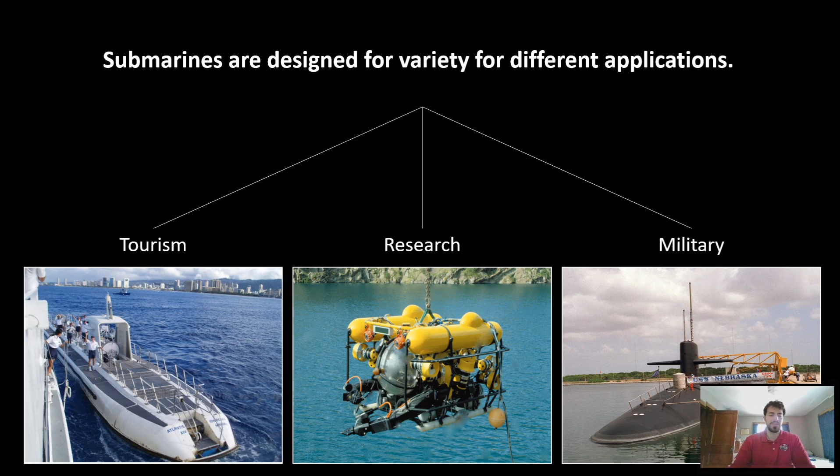They look really tiny. There's only one in service right now, and that's partially because it's just so expensive to build and to modernize these submarines. But even though only one is active, they have 6 built. And the number of people that you can fit in here is hundreds, and that's just an estimate, so we don't have any hard data on this, but they can fit a lot of people in the submarines.

I mean, that's massive. But now you might be wondering, how far under the ocean can this huge submarine go? It's so big, full of metal, it's so heavy. Well, the Typhoon can actually go as deep as 1,650 feet below the ocean. That's about 5.5 football fields, 1,650 feet below the ocean.

That's pretty deep. And now go back to that question about how heavy is this submarine, right? I mean, this is a 2 football field long hunk of metal and technology. How much does this thing have to weigh? To be honest, if I told you, it would be hard to even imagine. So I'm going to try to put it in perspective again.

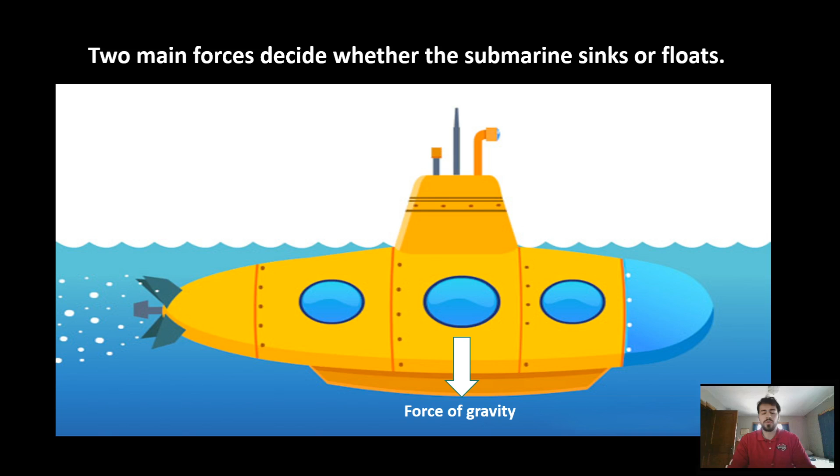Well, the force pushing it up is actually the force of buoyancy. Now, buoyancy is another thing that we may be familiar with. If you've ever been in a pool with like a basketball and you try to shove it under the water and then you let it go and it shoots up, that's buoyancy pushing it up. Buoyancy is the force of the water pushing an object up out of it.

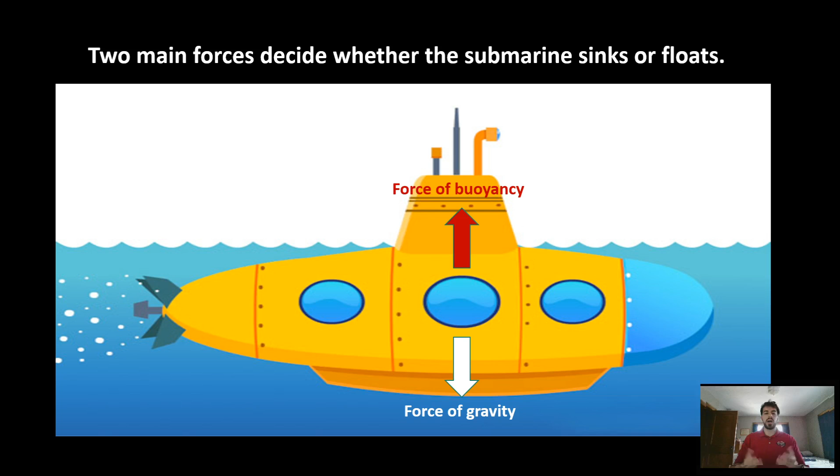All right, and that's another force that we're going to talk about in a little more detail here on this next slide. So buoyancy is important because it allows a submarine to float, but it also is the force that a submarine must overcome to sink and go underwater. And so it's important that we understand it a little bit more.

Now we talked about intuitively what buoyancy is. And so it's water pushing an object back up. You can think about a basketball under the ocean, but we need to be specific. We need to know how much force we're going to have to provide to overcome this buoyant force. And when we look at that and try to look at a numerical answer, we can use this equation.

Buoyancy equals rho times g times V. And rho is that funny looking p there. So you can think of that p as rho times g times V. In this equation, rho stands for the density of the water. Now that's a constant. Everything has a certain density, and so that's something that we can just plug into this

equation. The g stands for gravity. That's also a constant, and is something that we can plug into this equation. Now the thing that we can change, and the last part of it, is volume. So we need to change the volume of our submarine to change how much that buoyant force is operating on it.

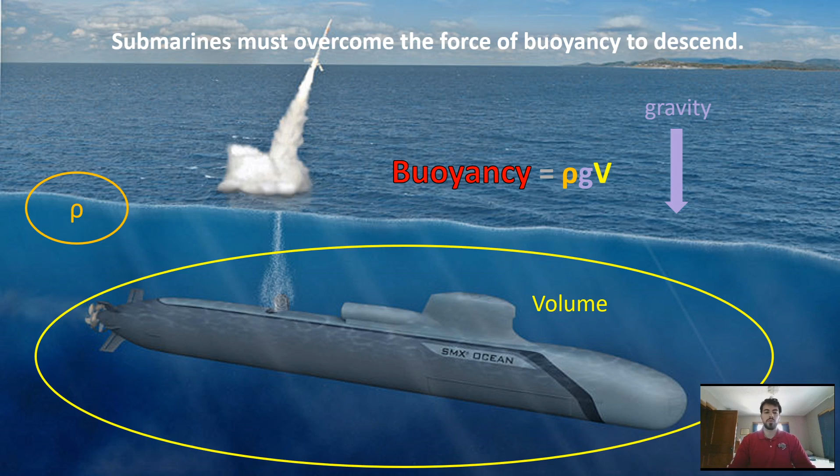Now, when submarines are sinking down into the ocean, they have to withstand high amounts of pressure in order not to be crushed by the sea. And a lot of times it might be hard to think about the fact that water has a lot of pressure, but you can kind of think about it when you fill up a bucket with water, right? That bucket's really heavy. Water has weight and it's being pulled down by gravity just like everything else. And as you go deeper and deeper in the sea, you have more water above you that's coming down, pressing onto you, and that's why you experience more pressure.

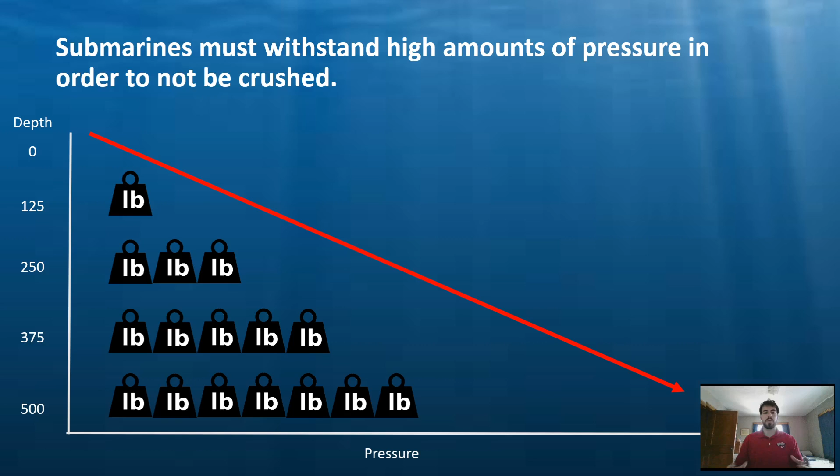So if we go 125 feet under the water, we might experience some amount of pressure. Then when we go to 250, we might experience a lot more. When we go to 375, even more. And then finally at 500, we're experiencing a lot. And so it's really important for submarines that go so deep below the water to be able to withstand these high amounts of pressure without being crushed. And that's what we're going to talk about a little bit more.

You can also kind of think about it as we're increasing weight, increasing that force of gravity, right? It's like when you fill up that bucket with water, it's getting pulled down by gravity. We're filling up the submarine with water. It's going to get pulled down more by gravity, and that's going to allow it to sink. Now, at a certain point, it's going to be equal with the water, and maybe we're going to want to come back up, right? Come back up to the surface, get some fresh air. At that point, water is actually going to be expelled from the bottom of the ballast tank, so it can be pushed out. And when we empty it, that's going to allow our submarine to rise again to the surface and do whatever it needs to do.

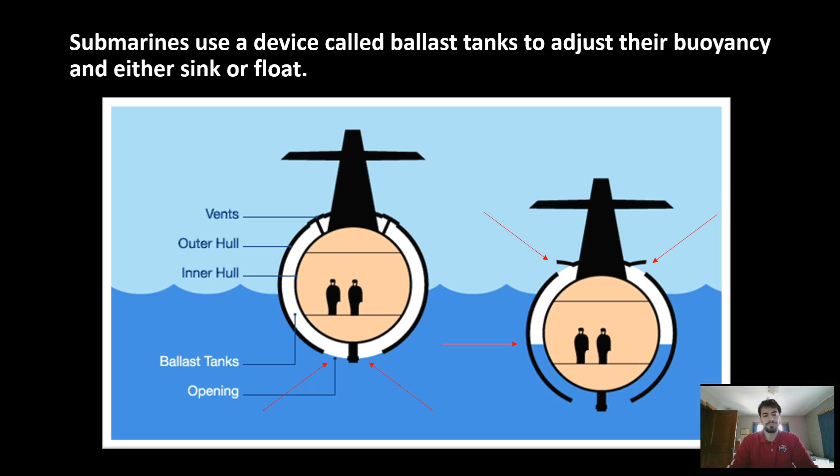Now, something else that's important to notice here is that these ballast tanks are created by two walls, or two hulls is what we call them. And one of the purposes of hulls is to create those ballast tanks, but another purpose is actually to allow these submarines to withstand large amounts of pressure. The inner hull is especially important for this. It's that inner wall. And it's actually sometimes called the pressure wall or the pressure hull. It's usually made of a really strong, tough material.

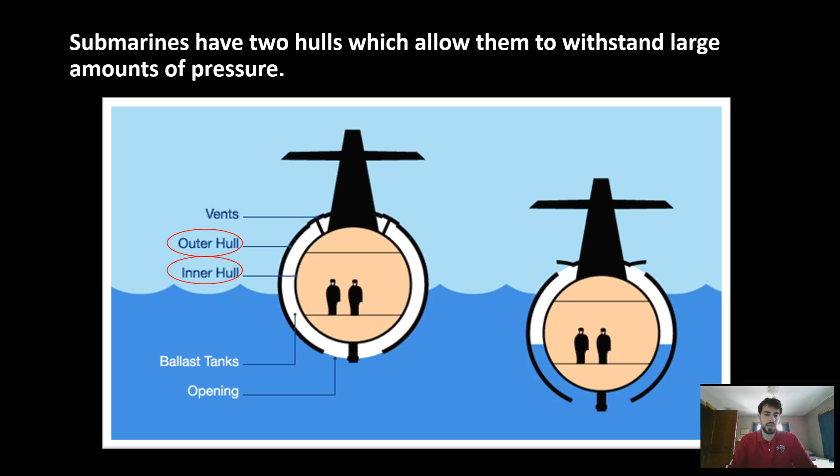But having that outer hull also benefits in making sure that the submarines can withstand pressure. So you can remember that that outer hull is important for keeping the water out and also important for some of the structural strength of a submarine, but that inner hull is really what allows the submarine to be tough and withstand all that water pressure that we talked about before.

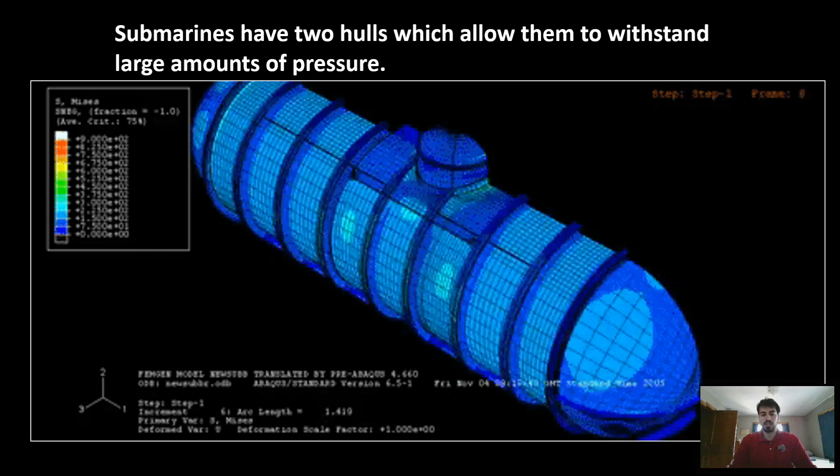And so if you look at this diagram, and this is kind of just for fun, it shows you where a submarine is going to collapse first if it has too much pressure. And you can see they're really strong around the edges and a little bit weaker in the middle. But this is only at really high amounts of pressure. And so it's good to know what the limits are for a submarine and how much pressure is too much.

Now, the last thing I want to talk about is what engineers are actually working on a submarine. So there's no such thing as necessarily a submarine engineer, but we have a lot of different types of engineers who might work together in order to design them, because there's a lot of different parts of a submarine. So the first one is a structural engineer. So take a second to think about, what could a structural engineer be working on? Well, they may work on the hulls that we talked about, right? Those walls that keep the submarine from collapsing. That would be really important.

Another type of engineer is going to be a mechanical engineer. Anyone think about what they might work on? Well, they're really going to be working on anything that's a lot of moving parts in the submarine, anything that has to do with mechanics. So the propellers, the engines, they might even help with some of the structure as well. That's something that a mechanical engineer might be really, really focused on when designing this.

Next is an electrical engineer. What do we think they might be working on? Well, submarines have a lot of circuits and electrical systems, systems like radar, systems that allow them to know how deep they are, power, all those things are super important. And so that's what an electrical engineer might be involved with.

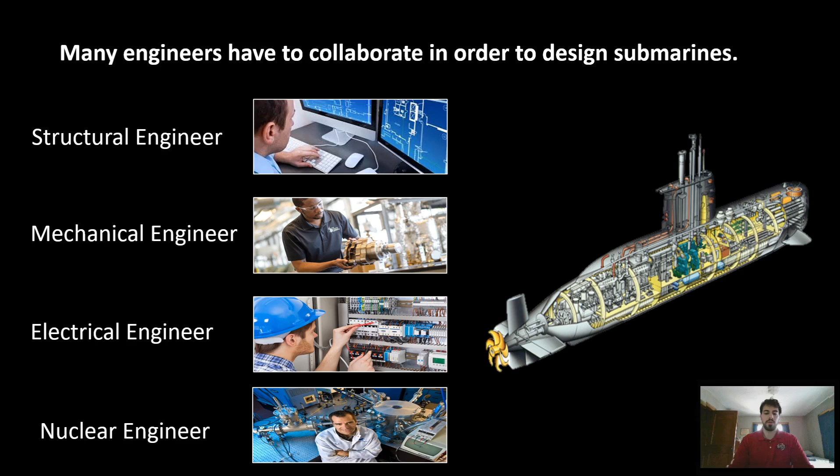And now I've only listed 4 here, but there's a lot of other types of engineers who might be working on submarines. So computer engineers, chemical engineers, even biosystems engineers might be doing something down here to improve the submarine and make sure that it's a safe product or a safe vehicle for all different sorts of people to use.

So in conclusion here, engineering really allows us to do some extraordinary things, like exploring the sea hundreds of feet below the surface in a submarine. All the while, we can preserve our happiness, our health, and our safety, and not have to worry about water crushing the vehicle we're in or not being able to rise to the surface. And that's something that's really awesome.

Now, does anyone have any questions? I can't really answer your questions in this video, but I'll answer a couple of questions that people usually ask. The first one is, a lot of people wonder, how do people breathe on subs, right? I mean, they go down deep underwater. Where do they get the air from? Well, this is actually where a chemical engineer might come in. Submarines can store air in tanks, or they can create air through a chemical process known as the electrolysis of water. And so you can create oxygen out of water. And that's something that you can maybe Google and learn a little bit more about.

Another question that people ask pretty often is, how long can submarines stay submerged? Now this varies, but generally months at a time they can be underwater. And this is especially true for military subs, where sometimes it's really important for them to be down under the ocean for a long time. And so those are some frequently asked questions.